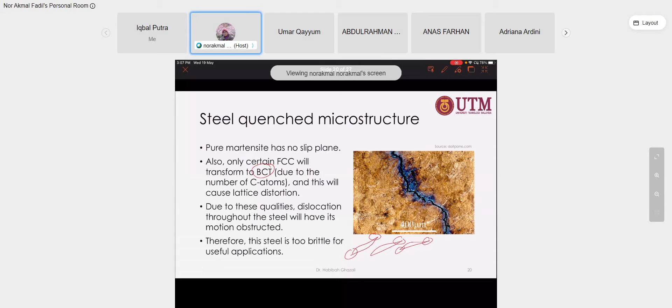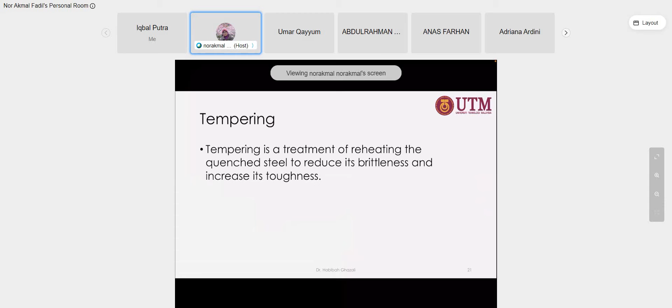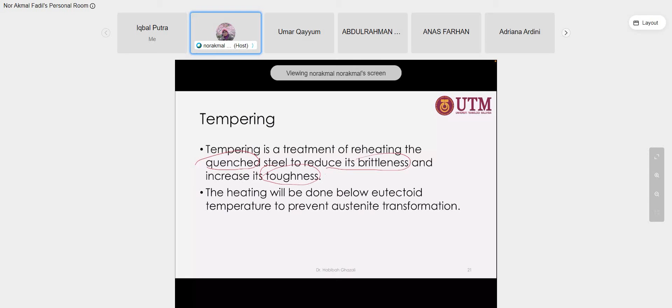So that's the reason we need tempering. It's just post-processing, meaning it requires a heating and cooling process, right after the quenching and cooling. After quenching, we cool it to room temperature, then we do the reheating process just to reduce the brittleness and increase the toughness. How can the toughness increase? Because this one is already reduced.

Remember the graph of a stress strain curve. If we sketch the brittle structure, it will fail without plastic deformation, and the area under the curve is small. This is defined as brittle, plus less or low toughness. Through the graph, we can interpret that it failed within the elastic region, less plastic deformation, and the area under the curve is small, showing less energy absorption.

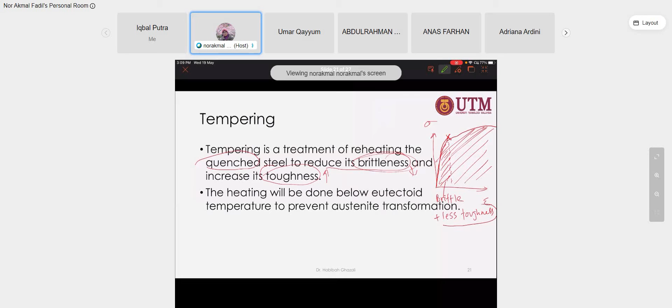So we want to eliminate the brittleness. If we compare between these two, this shows area under the curve larger compared to the first one, or maybe not like this. Practically, this may be after the heat treatment process, after the tempering process. Maybe the tensile strength is slightly higher than the fracture strength of the brittle material, but the area under the curve is larger, and for the green one, it is high toughness.

And less brittle. Why? Because it fails after showing plastic deformation. Therefore, toughness is associated with brittle versus ductile fracture. It will show some reminder or signal, by showing some changes in the dimension of your component or any engineering component.

If there is plastic deformation, for example let's say the vessel - pressure vessel - and inside the vessel there's high pressure, so the way you monitor the safety of the pressure vessel is by measuring the thickness of the vessel. If you measure the thickness and you see some differences or reduction in the thickness, it means there is a sign of plastic deformation.

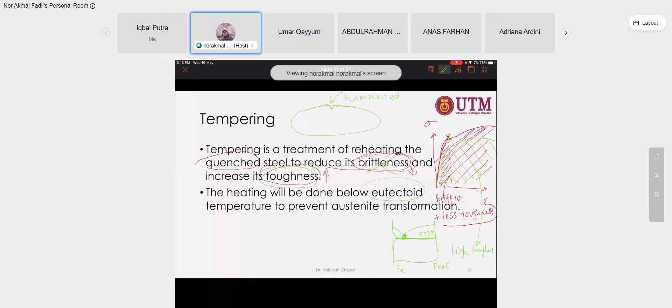What is eutectoid temperature? Still remember from the iron carbide phase diagram? So this is the point for eutectoid temperature, and this is the line for eutectoid temperature, which is 727 degrees Celsius. So for the tempering process, the temperature for tempering is below this temperature, meaning there's no transformation into the austenite phase.

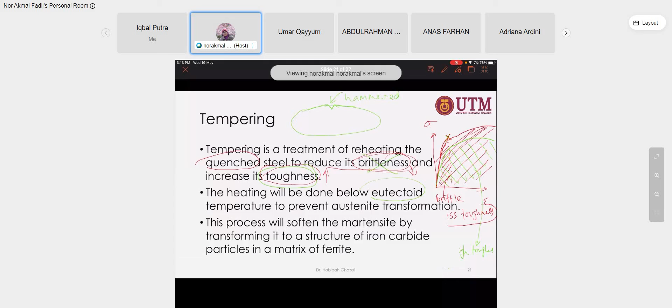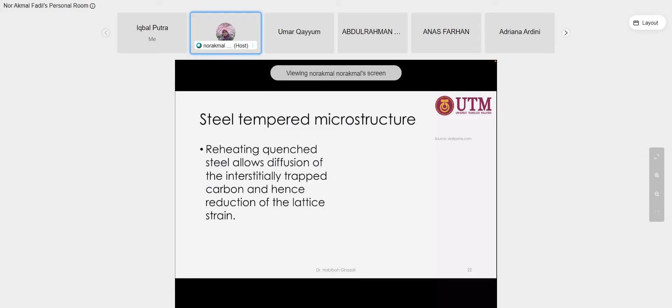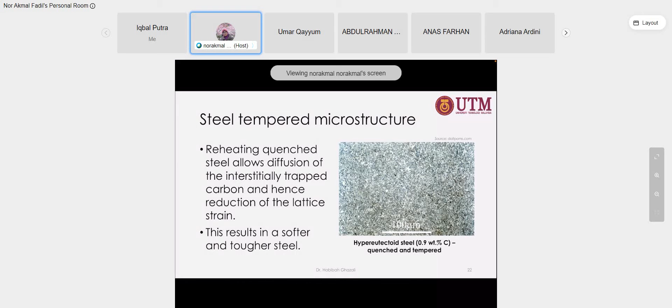Higher temperature with longer tempering time will produce steel with higher toughness, but not always. Too high a temperature, like 800 degrees Celsius, will reduce the strength and perhaps it will reduce the toughness.

Lower tempering temperature will retain more martensite, therefore the steel will be harder than with a longer or higher temperature tempering process.

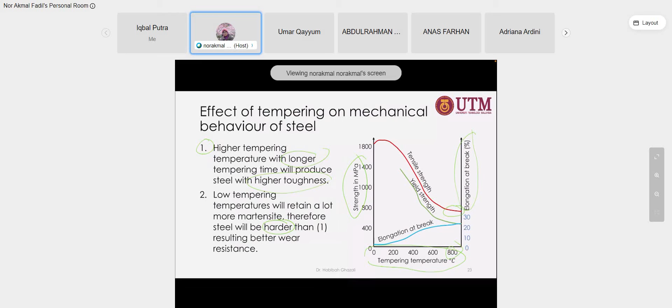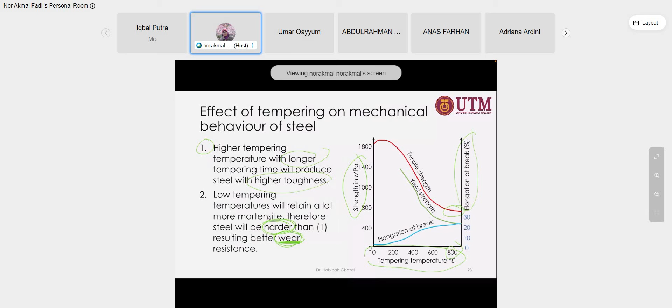One more thing: when we talk about retaining hardness properties, we can benefit from this property for better wear resistance. This means if the structure will not experience impact load, you can utilize the hardness for wear resistance. This is important for engineering components that always experience friction load.

So there are pros and cons when you increase the temperature or prolong the tempering process. In summary, heat treatment is the process of heating, holding at temperature, and then cooling. If you look at the temperature versus time profile...

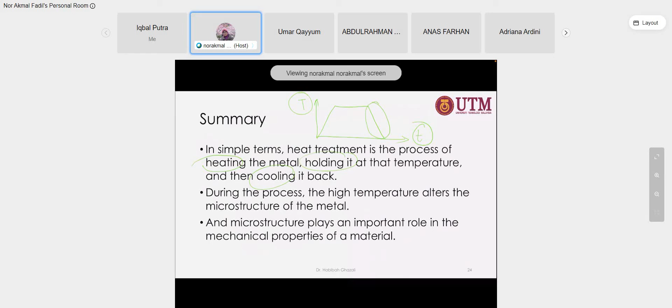You just need to heat, soak, and cool. The time is important, the temperature is important, and the cooling rate is also important, whether very fast, slow, or very slow. The cooling rate will determine the final microstructure.

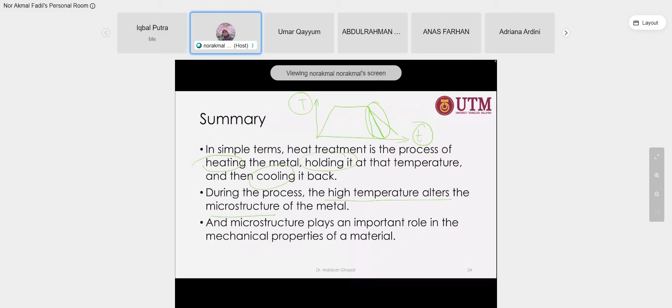During the process, the high temperature alters the microstructure of the metal, and microstructure plays an important role in the mechanical properties of materials.

The final outcome of the heat treatment process depends on many different factors. This includes the heat treatment temperature, the time, and the rate of cooling, as I already mentioned.

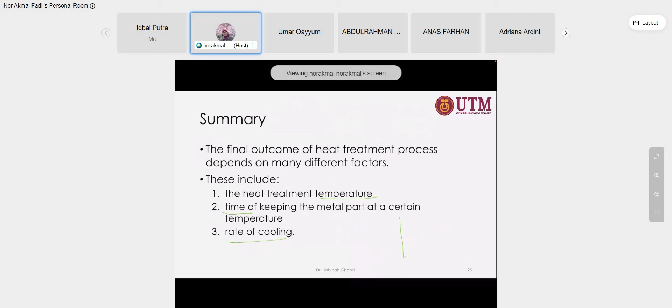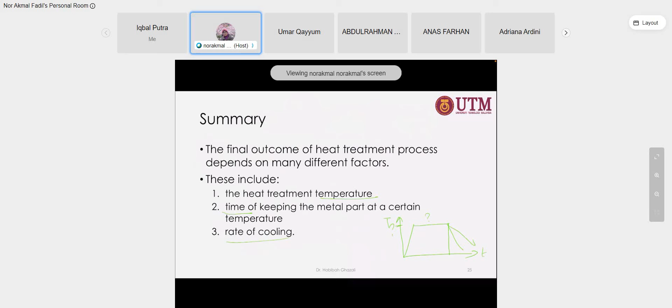Remember this diagram: temperature versus time. Heating at what temperature, then soaking for how long, and the cooling rate, whether slow, moderate, or very fast.

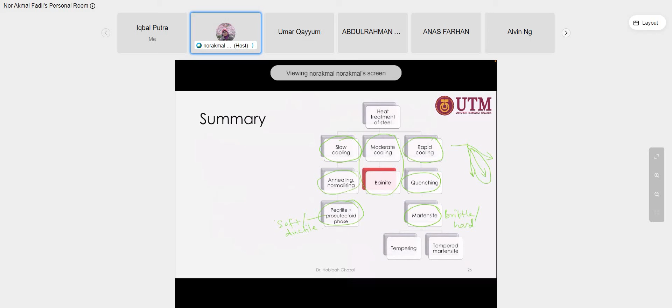This can be adjusted depending on the size and the process. The difference is only in microstructure. You can adjust the cooling rate, whether very fast, moderate, or very slow. For moderate, you need to adjust the degree of temperature reduction over time.

So for microstructure, we get higher strength for martensite, or higher hardness, and very high ductility for spheroidite. How do we get spheroidite? This is only for hypereutectoid steel. This modification of pearlite structure into a spherical microstructure will obtain the highest ductility of the steel. We're talking about steel only.

This is only the heat treatment for steel, but heat treatment can also be done for other non-ferrous alloys, for example aluminum alloy and many others.

Any questions so far before we move to the next lesson?

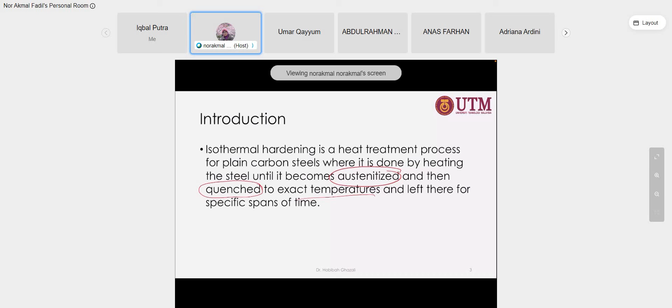Okay, specific temperature. We hold at this temperature and leave it there for a specific span of time before we cool it at room temperature. We allow the phase transformation at this isothermal temperature. During this heat treatment, the microstructure transforms into a combination of different microstructures.

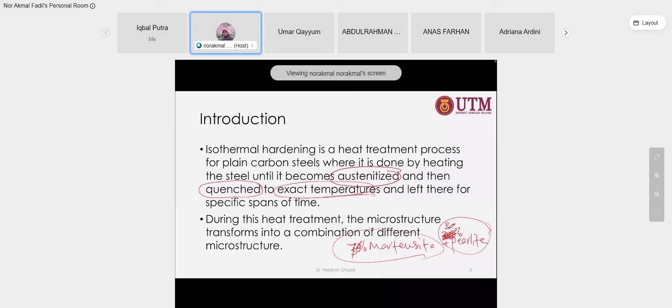We can customize what temperature, what microstructure we want. If we want a mixture between martensite plus pearlite, yes, we can. We want it to be 10% and 90%, yes, we can. This is where we can tailor our product, our engineering component. We can have whatever the portion. We can have it 50% martensite and 50% pearlite, because we know this is hard. You want to increase more martensite and half of it pearlite. Or if after testing the product you think it has less hardness, you can further increase to 70% and 30%. Yes, of course you can. This is the process where you can tailor the microstructure of the product.

So, method for determining isothermal transformation. Of course, if you are working in Malaysia, in any industry involving steel or any steel maker company, you don't have to think about this so much. This is the history of how the transformation occurred. People started with experimental work. Before, this was the job of the steel supplier.

Let's say they have steel containing 0.8% carbon. They test it. Okay, this is new steel, it contains 0.8% carbon. I want to know what possible isothermal reaction can be performed on this steel. So you are the producer of this new steel material. First, it is heated in the furnace, at the austenite temperature. So depending on the composition, you need to refer to the phase diagram.

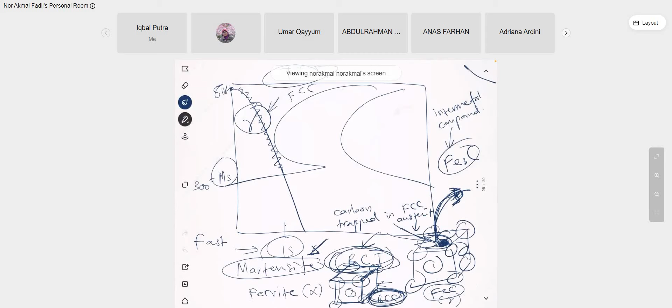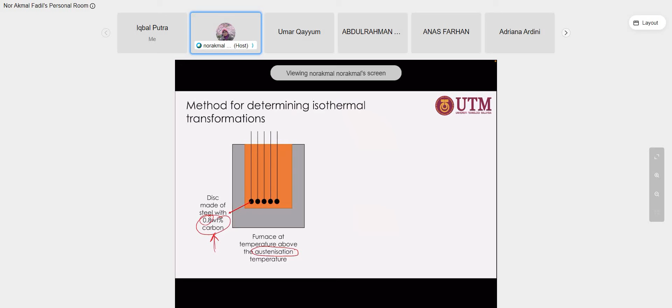The austenization process highly depends on the temperature. You need to know for this steel, with 0.8% carbon, what is the temperature to obtain the austenite phase. And then, after some time, holding at this austenite temperature and ensuring that all the microstructure inside the steel is transformed into austenite. This is austenite.

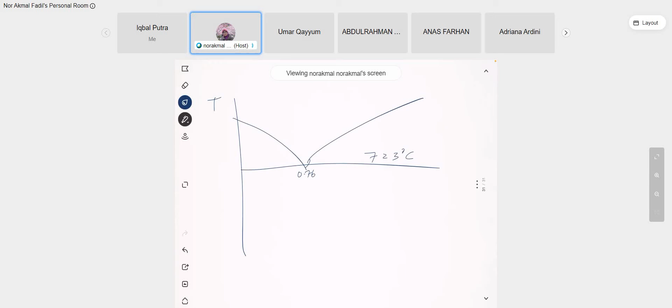Let's say this is 723, and this is 0.76. This is temperature versus carbon percent. So let's say this is 0.8%, and this is temperature 740 degrees Celsius. So to achieve the austenite phase, and of course at this bottom, this is alpha plus cementite.

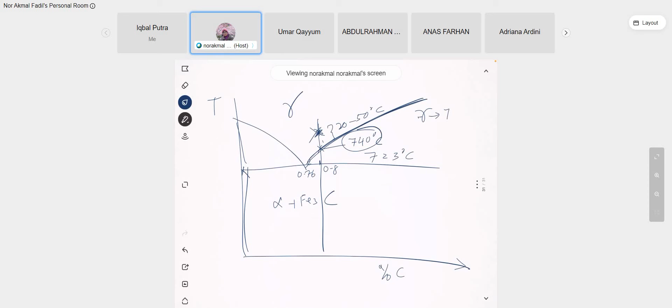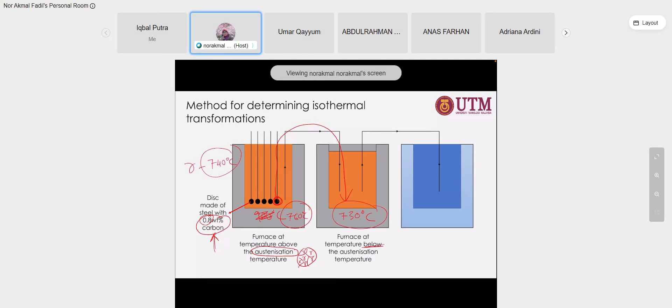Let's say you take 730 degrees Celsius. So meaning from 760 to 730 degrees Celsius, you put it into this furnace, and then, let's say for example at this temperature, 0.3 seconds or maybe 1 second, whatever the time, you need to investigate, run the experiment for a series of soaking times inside this temperature before you can quench it into cold water. Room temperature, 25 degrees Celsius. First sample maybe 0.3 second, second sample 1 second, third sample 5 seconds. It depends on your observation.

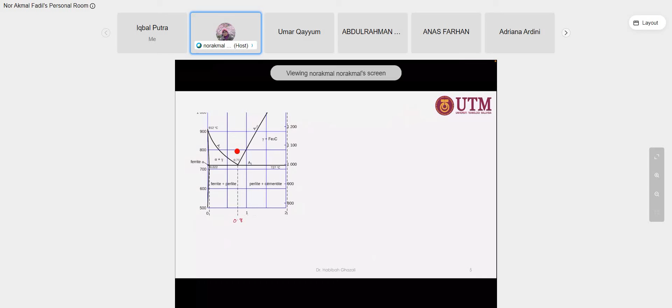So this is the phase diagram. In this example, we use 0.8% carbon. Let's say this is the composition of your alloy, and then you take above 727 degrees Celsius to achieve austenite temperature. So this is what happened, right? Firstly, you heat it up to this temperature, and after 6 seconds, you quench at this temperature, which is 700 degrees Celsius. This is the first experiment, at 700 degrees Celsius.

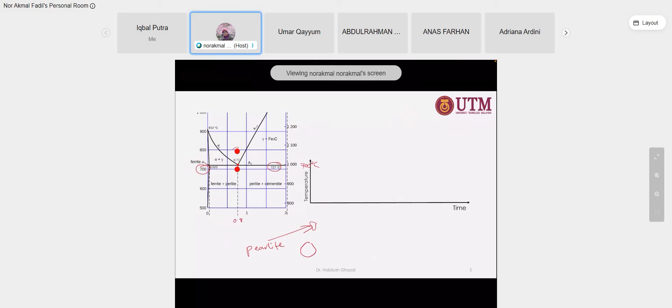And then the first one, sample number 1, after 6 seconds, you quench into cold water. You can see there is a small amount of, what is it, pearlite. And then again, let's go to this one. This is sample number 1. Sample number 2, you take 18.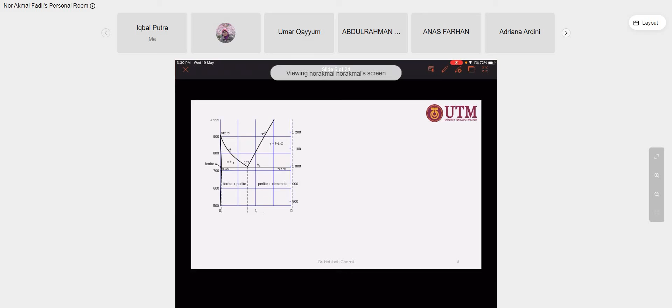Okay, 18 seconds, right? After 18 seconds, you can see more perlite. At 22 seconds, sample number 3, you hold at 700 degrees Celsius for 22 seconds, and then you cool it down to room temperature by quenching in the cold water.

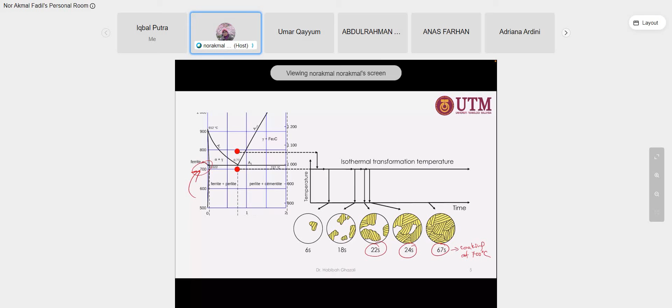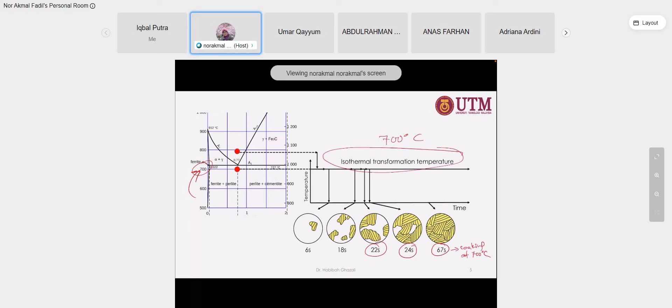After 22 seconds you can see more perlite. If you prolong the soaking time before quenching to 24 seconds, you can see more microstructure of perlite, and then it is completely transformed into 100% perlite at 67 seconds soaking at 700 degrees Celsius. So soaking time, holding at this particular temperature, will influence the transformation. This transformation occurs at 700 degrees Celsius, which is the first isothermal temperature.

Using the isothermal data at 700 degrees Celsius, which is the first temperature, identify the start and finish times of the isothermal transformation. This is temperature 1, the first and the last. This is how the steel maker will produce the data: first they take one temperature and see at what time the first transformation into pearlite occurs.

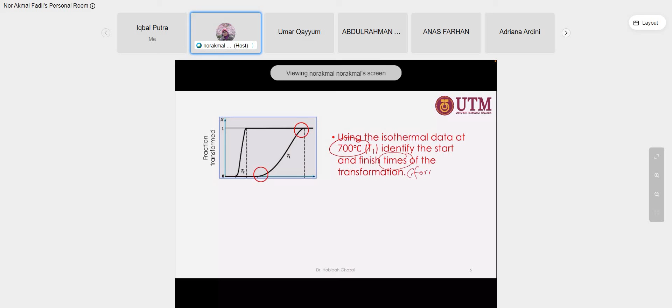Formation of pearlite - then at what time they see the pearlite is 100% transformed. They record these two points, and then use the same method at a different temperature.

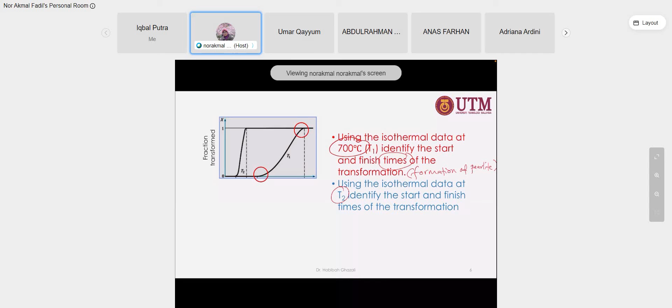Using the isothermal data at T2, identify the start and finish time of the transformation, and see if it is still pearlite or another microstructure. Then plot the start and finish time to develop the C curve or TTT diagram. This is the C curve, also called time temperature transformation - TTT diagram or C curve diagram.

This is the data provided for one single steel - in this example, 0.8% carbon. So let's say you produce a new carbon steel, which is 0.9%. You need to do the same, using various temperatures - 1, 2, 3, 4, 5, and so on - to ensure that the data plotted follows exactly the curve.

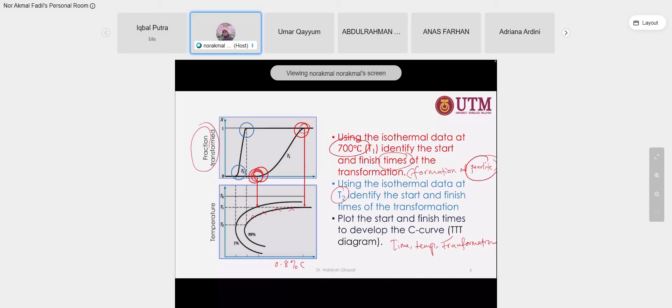So the beginning of transformation - the fraction of transformation from 0, meaning there's nothing, or maybe 1%, we can say is the starting point. The fraction of transformation, meaning the formation of pearlite - so the beginning of pearlite, this is the time.

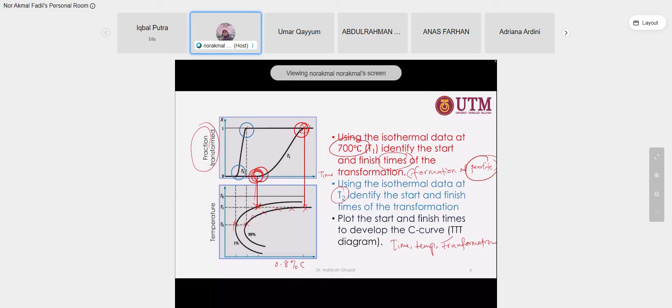So the first point we plot here, and the 100% of pearlite formation will be plotted here. Second temperature here and here, and then you plot the graph, and this is the final curve. Of course you need various temperatures to ensure what microstructure you obtain - not just two, because let's say you choose two temperatures, one is 700 degrees Celsius and the second temperature T2.

How do you determine this point? You can only obtain this point after you conduct a series of soaking temperatures and soaking times - a series of time. Only then can you see this pattern.

So if we are looking at this C curve, or TTT diagram, isothermal transformation diagram - the microstructure, if you choose a temperature around 700 to 600, you can see under the microscope they are different between this range of temperature and this one. If you look at the microstructure, here is coarse pearlite - you can see 100% pearlite, but compared to this one, it is very fine pearlite.

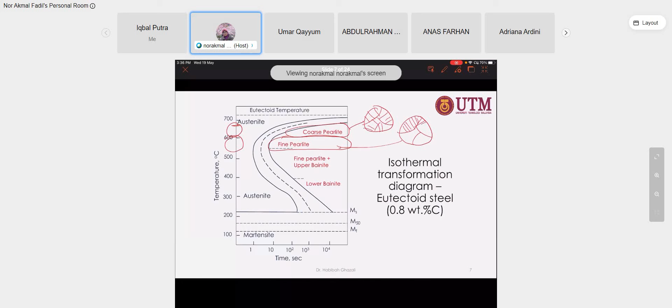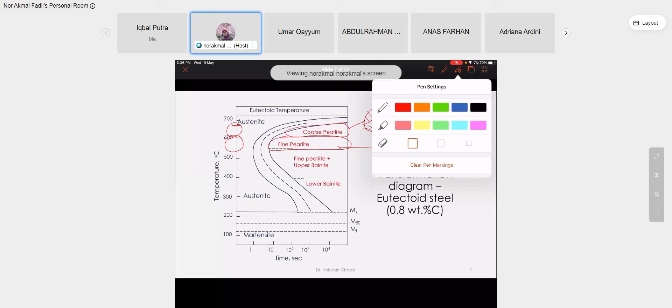All right, anybody can tell me why they are different in terms of size? Okay, coarse pearlite - they are all pearlite. And then the fine pearlite - this is fine pearlite. So do you know why they produce fine pearlite?

Compared to the higher temperature of soaking or isothermal temperature - high temperature, low isothermal temperature - why? Anybody? [Student: Temperature difference.] When? From what temperature to what temperature?

Temperature difference. Okay, sorry, I don't know what you mean by temperature difference. So how does temperature influence the difference in terms of microstructure? Any idea? How is the fine pearlite obtained if we choose a lower isothermal temperature? For example, we take this one at 550 degrees Celsius and this one at 650 degrees Celsius. Do you know why?

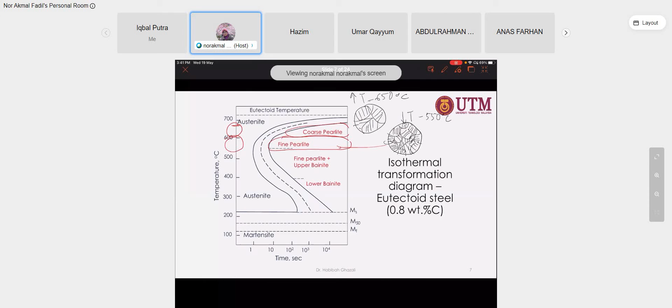Okay, alright. Susah, okay, dia terlampau kompleks. This is engineering complex. Lepas tu nak jadi engineer ni you kena serabut sikit. Kompleks lah, right, okay, if you still remember.

Okay, right, during the process we do for this one. This is the temperature where we want to ensure that we still have austenite. At the equilibrium reactions, you can have austenite transform into pearlite.

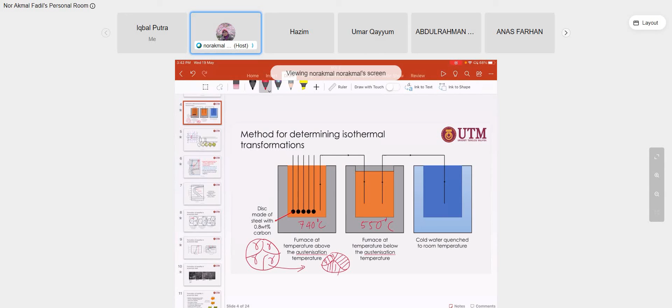Okay, equilibrium means that it will naturally diffuse over the reduction of temperature. Semasa sejuk tu, naturally dia akan forming pearlite, right? But the pearlite size, the grain size of pearlite, might be different if you change drastically to this temperature, not to room temperature, but from let's say 740 degrees Celsius, you change it into 550 degrees Celsius.

It means, imagine 700 to 550, it is a big sudden change, within a second. This one is also called quench, for the 200 degrees Celsius reduction within a second. So what does it mean? There is some quenching effect.

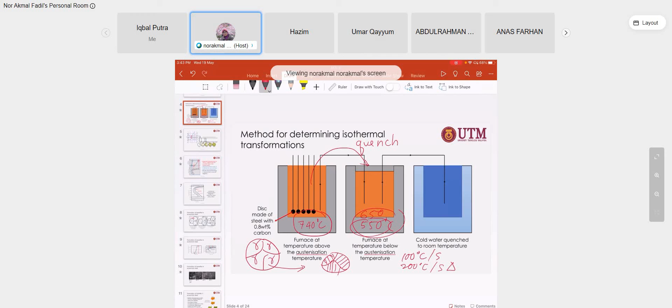If you reduce to 650, maybe it's not really sudden, it is just 100 degrees Celsius per second, about that value. Compared to this one, it is 200 degrees Celsius per second. Large temperature difference, it is more rapid cooling compared to this one, not really rapid, but faster cooling compared to the first one.

So because of the cooling rate, the change is very fast, not to the room temperature. I'm not talking about changes to the room temperature. Quenching is not necessarily to the room temperature. This is also called quenching, meaning that you immediately change. So this is what happened.

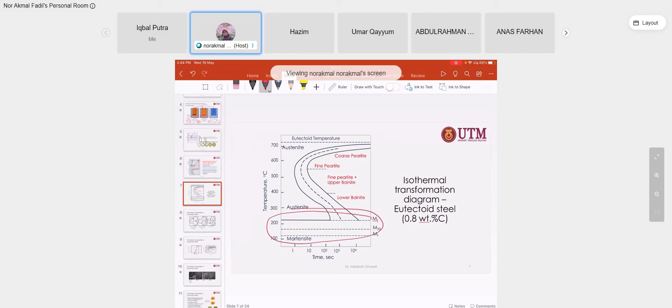So because it is high temperature, 550 to 650 degrees Celsius, you don't see martensite. You will only see martensite if you achieve this range of temperature. So now it is only 600 to 550 degrees Celsius. So what you can see is only pearlite.

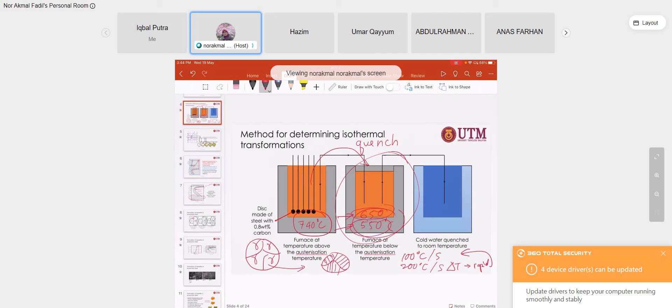So now you know, if you want to have coarse pearlite, let it cool slowly, like annealing process. This is normal annealing process, you don't need this process, but if you want...

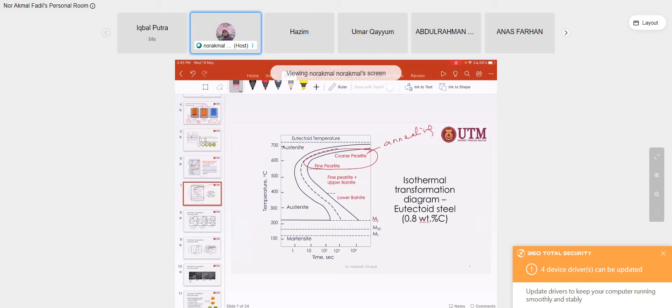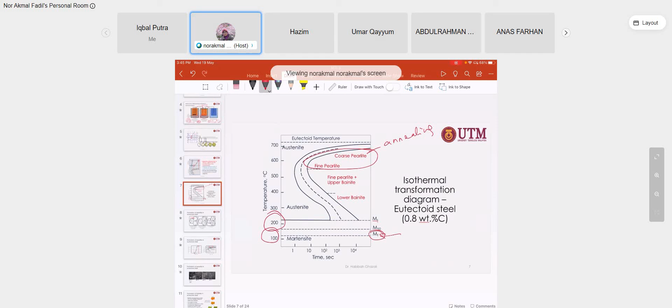Other microstructures such as lower bainite and martensite, you need to know what is the temperature. For example, if you want martensite, you need very fast cooling, for less than 1 second. This is the time. So your cooling process to this temperature, to achieve complete finishing of Mf, referring to the finish formation of martensite, less than 100 °C, you need to achieve this within less than 1 second. This is low.

Okay, there is another microstructure, upper bainite, sometimes mixed between upper bainite and fine pearlite. So if you want to obtain fine pearlite, you can quench to this temperature and hold it for 10 seconds, or maybe 20 seconds to be safe, maybe 50 seconds, and then after that you can quench to room temperature. Then your microstructure will be fine pearlite.

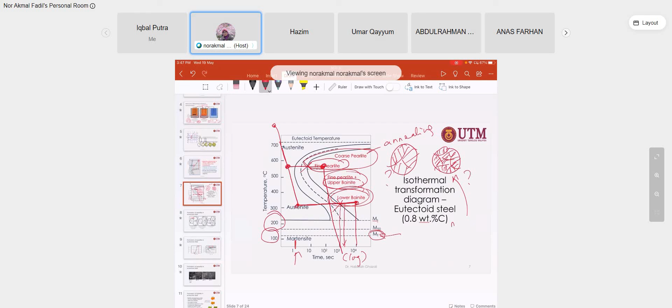Okay, compared to, if we compare fine pearlite and coarse pearlite, right, what is the difference in terms of the mechanical properties? What is the difference between these two, coarse pearlite and fine pearlite? This coarse... what's the difference?

Fine pearlite undergoes plastic deformation. What about the coarse pearlite? It doesn't experience any plastic deformation. Coarse pearlite exhibits a structure discontinuity upon deformation. Discontinuity, what makes you say it's a discontinuity? What does it mean, discontinuity?

I don't really know, Doctor. Google. Oh, all right, okay.

If we relate to chapter 3, 4, strengthening mechanism and mechanical properties, it is straightforward saying coarse grained versus fine grained, isn't it? Am I correct? So if we guess the mechanical properties between these two, what mechanical properties are different between these two?

Okay, just now you mentioned ductility, which one is more ductile? Coarse. Coarse, yes, so coarse pearlite is softer than fine pearlite, because of the grain. Finer grain means containing higher amount of grain boundary, higher obstacle to the dislocation motion.

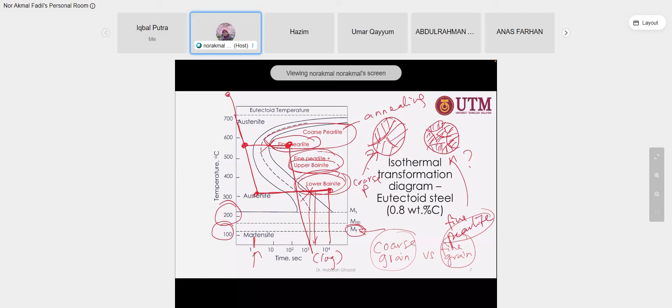No, in this case, you don't need to alter the chemical composition of your alloy. What you can do is reduce the size. You still want 100% pearlite, because pearlite is tough, but if you want it tougher, you just reduce the grain size. Then you can get whatever properties you want.

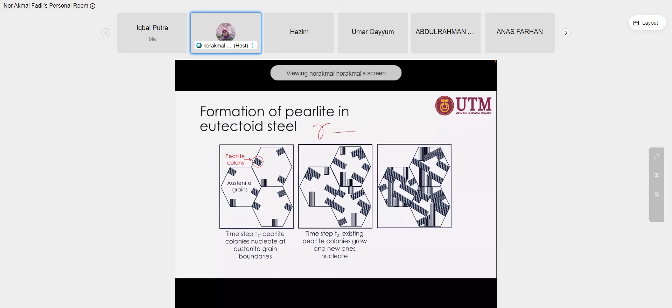So the formation: inside the austenite, the pearlite colony is formed, and then it grows. This is normal behavior of diffusion, solidification, or any phase transformation. The changes from austenite into pearlite happen at the solid state.

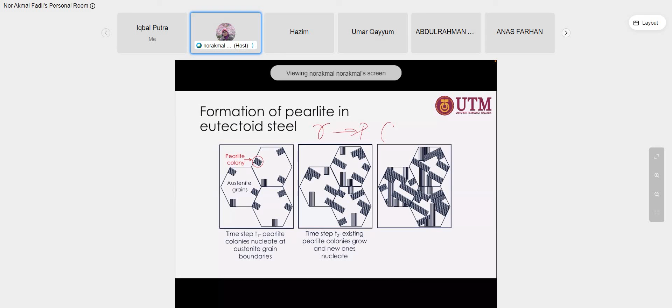What happens inside this transformation in the solid state is carbon diffusion. Carbon diffusion happens because carbon is very small and lightweight, so it moves easily inside the crystal structure of the iron. It moves and rearranges to form pearlite, and the longer the time, the larger the amount of pearlite, and the process continues.

So this is the time. Look at this, this is the time. You need to choose wisely what time is needed if you want it to be 100% pearlite, or if you want the middle, maybe 50% transformation. So if you want only 50% pearlite, you stop at 100 seconds.

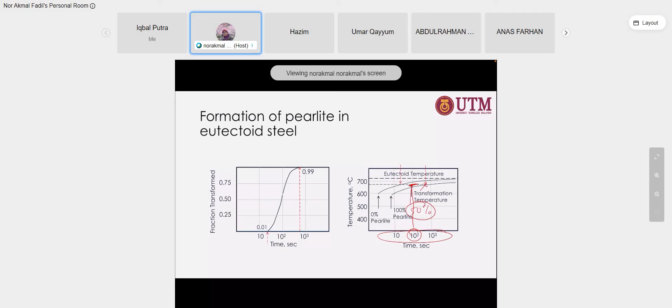Don't go for 1000 seconds, because if you go until 1000 seconds, you don't have normal austenite anymore — it's completely transformed into pearlite, so there's no more austenite. If there's no more austenite, whatever changes you made will remain unchanged. So you need to know what time is suitable if you want a certain fraction of whatever phases you want.

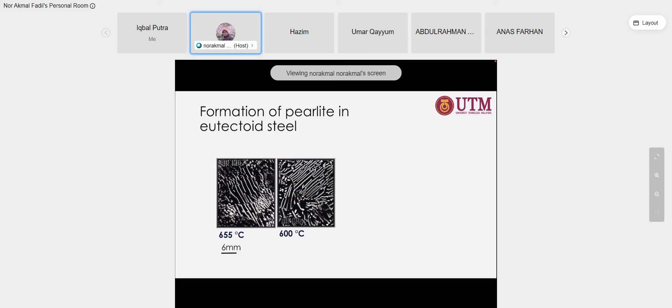So this is pearlite at a different quenching temperature or isothermal temperature. Further reduce the temperature, and you see larger and smaller grains, and so forth.

Next is the formation of bainite. Bainite forms with a slightly faster cooling rate during soaking at the isothermal temperature. Bainite microstructure consists of a non-lamellar mixture of ferrite and carbide. The higher holding temperature gives rise to what is commonly called upper bainite, and the lower temperature gives lower bainite.

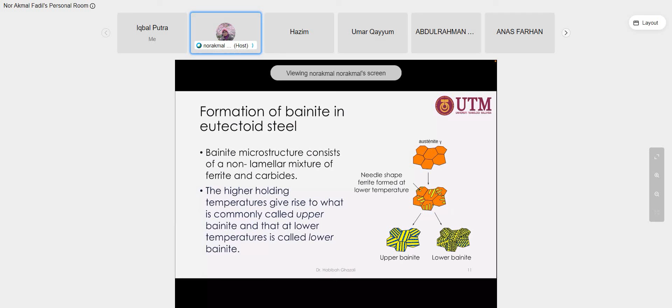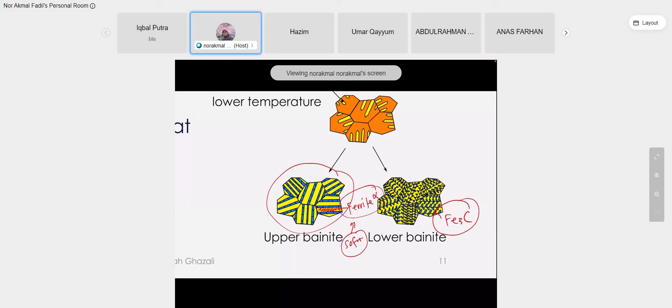This white part is associated with soft ferrite. If you have this kind of microstructure, the softness of ferrite properties will be dominant. But if you have this kind of microstructure, where the area of clean ferrite is less, you can see that ferrite is packed with a small fraction of cementite, so this microstructure shows a tougher result.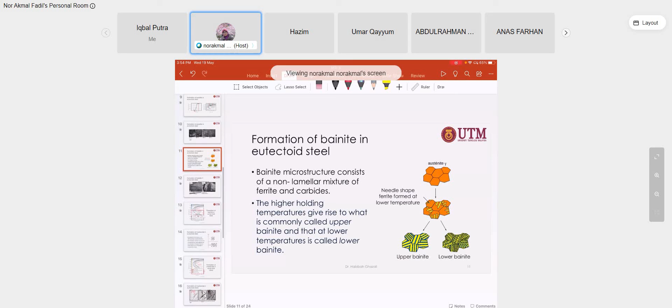I should stop right here because it's already 4 o'clock. So, lower and upper bainite.

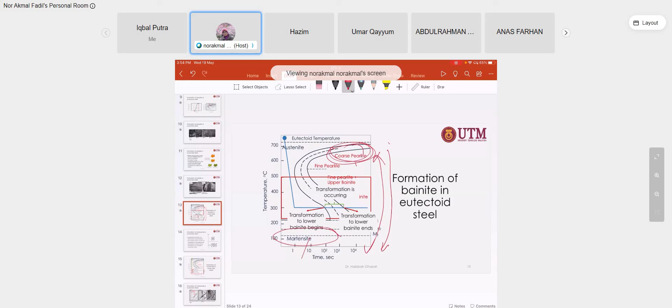If we look at this TTT diagram, this one is softer, and this lower one is harder. In between, there's an increase in hardness from coarse pearlite to martensite. So this one is soft, and the bottom is hard or strong.

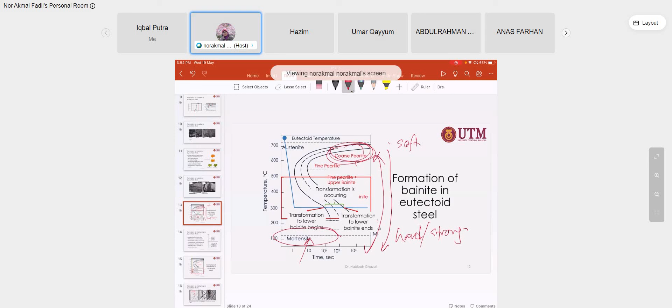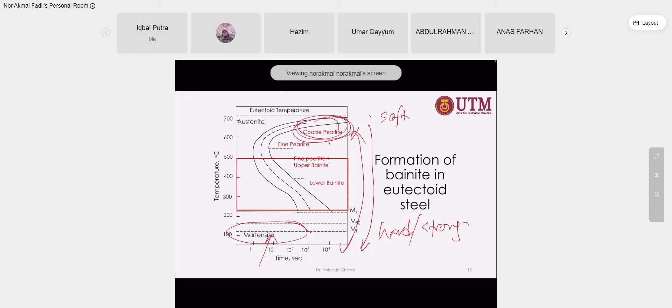So you can choose whatever microstructure you want. Bainite basically dominates at this range of isothermal temperature — let's say from the austenite region, and then holding beyond 2000 or 3000 seconds.

Basically, we take longer than this limit, and then quench to room temperature, or cool it slowly, whatever — because once there's no more austenite, whether you cool fast or slow, there are no more changes after that. This is the beginning of transformation.

This is the point where it starts to form lower bainite, and this is the point where the transformation into lower bainite ends.